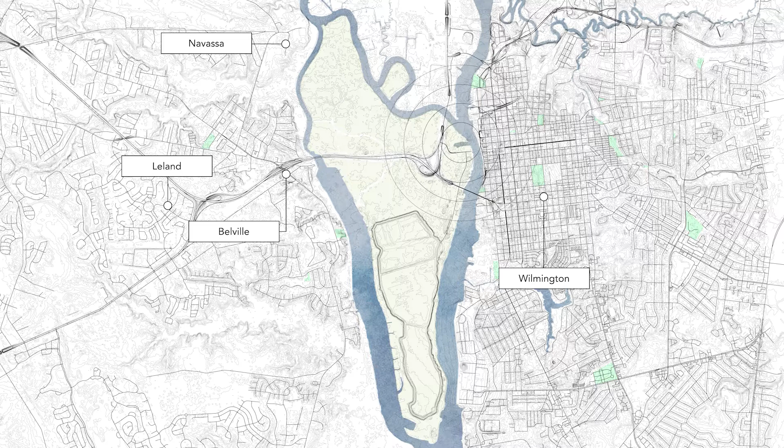Key nodes for the Connectivity Park Master Plan include an education center where visitors can learn about the island's history and the way the landscape and ecology have changed over time, or scale the observation tower for a bird's eye view of wildlife or the nearly 1,000 acres of parkland containing 7 miles of paddle trails and 8 miles of boardwalk.

There are 2 kayak hubs where park patrons can rent kayaks and explore 2 overlapping paddle trails, each approximately 3.5 miles long, and have close-up encounters with aquatic and marshland wildlife.

1.6 acres of the lagoon is dedicated to pedal boats, and crabbing stations are at the end of the half-mile boardwalk.

Several campsites are offered throughout the island to provide varying levels of overnight wildlife immersion in several unique and lively landscapes.

The Education Center is located on the high ground of the east coast of Eagles Island. It connects to the battleship through the Greenway Loop and extends the interest of its visitors further into the island. It is divided into 3 structures built in phases: water, woods, and sky.

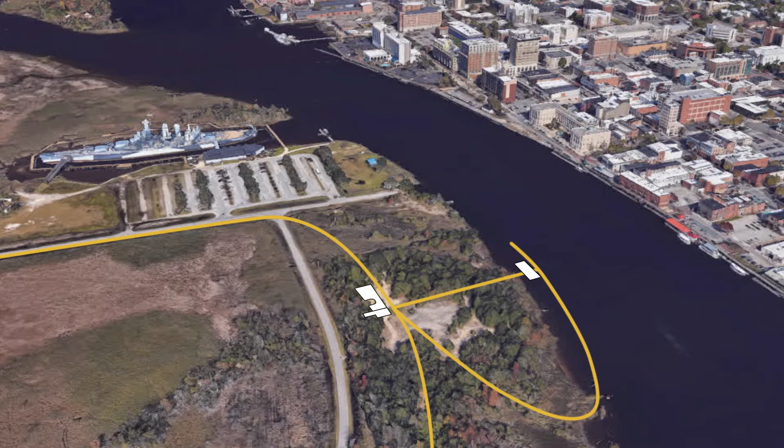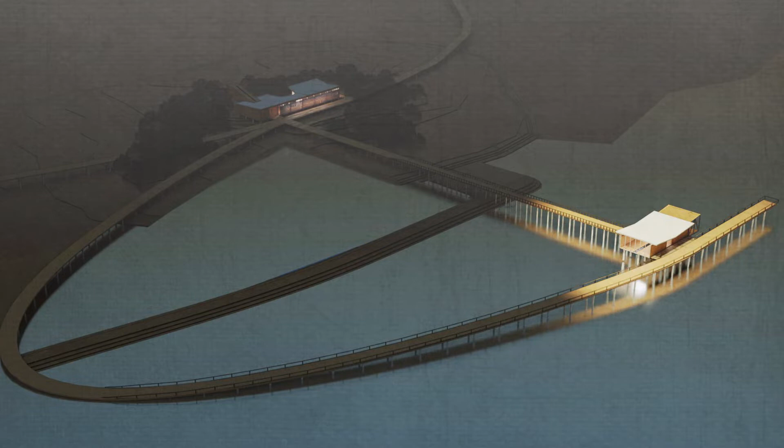These spaces offer different ways to learn about and engage with the historical and ecological features of this unique island: naval history and tidal information in the Water Center, Gullah culture in the main conditioned space, and an overview of the island and bird life in the tower.

The chosen site takes advantage of natural features in the area, including high flood-resistant topography and one of the few naturally occurring groves of trees on Eagles Island. Being above the reach of flooding ensures the building's safety and longevity, while the trees offer protection, shading, and a chance for visitors to closely interact with nature.

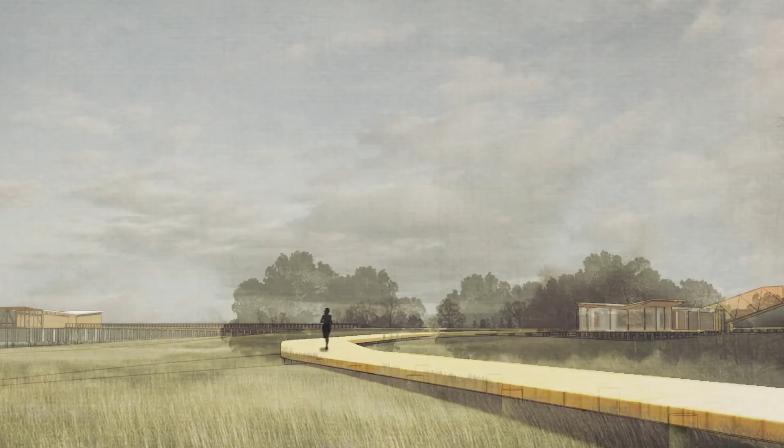Approaching the site, the greenway leads straight into the grove of trees. The main conditioned space emerges from the grove as visitors discover the building. The greenway extends along the side of the building and invites visitors to either side of the gallery inside. The building is divided on the axis created by a walkway leading to the river.

The largest area will be a flexible gallery focusing on the historical significance of the Gullah Geechee people and their contribution to the surrounding communities. A small open office will host staff functions and serve as a spot for camping registration.

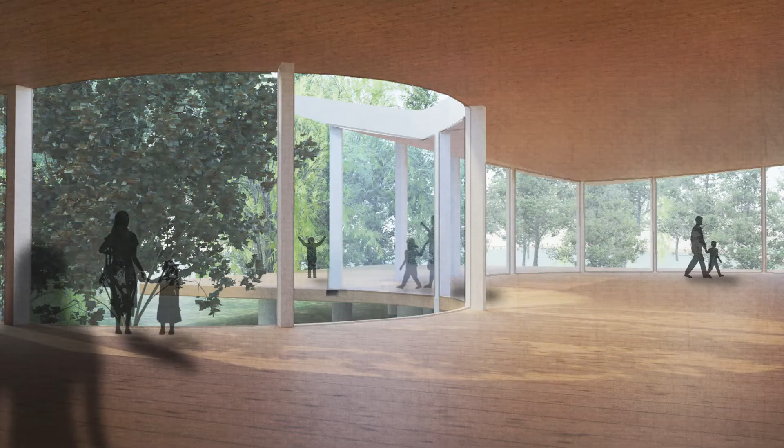The gallery is divided by a curved courtyard that turns into the space and gives visitors an up-close view of wildlife and helps the participants feel the woods surrounding them.

The butterfly roof opens toward the western edge of the trees and covers the porch area, directing the views upward into the trees. The west side of the building is full of large windows that open to a partially covered veranda that wraps around the north corner of the building, further connecting the wooded area to the interior.

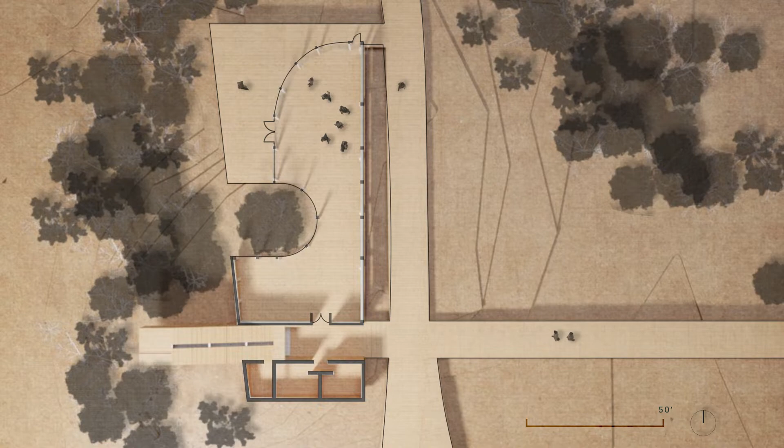The axis that divides the space guides viewers up a short staircase into the tower that protrudes from the center. It offers an opportunity for visitors to climb above the canopy and look out over the island.

The viewing tower will offer information about different sites in the master plan, as well as highlight interesting ecological features. The tower can also be used as a bird viewing station for the wide variety of indigenous bird species that call Eagles Island home.

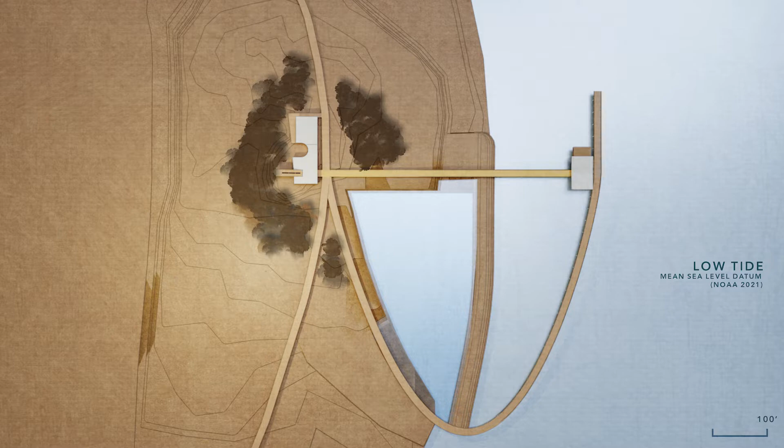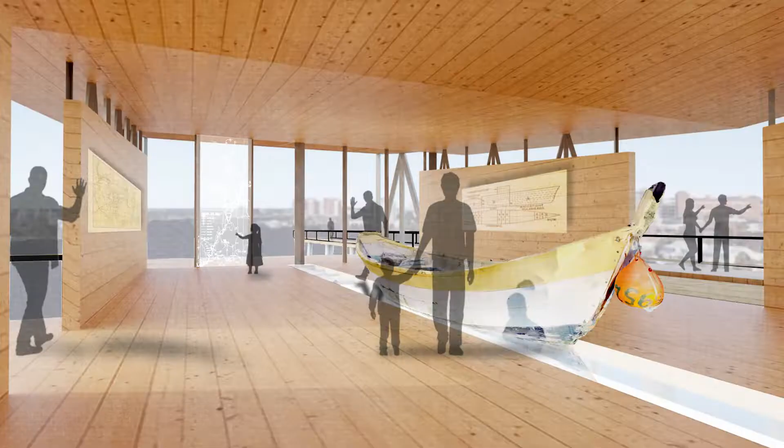Following the axis out toward the Cape Fear River, visitors will have access to the Water Center. The long boardwalk maintains the height of its origin, making the Water Center sit high above the tides. This space will focus on the naval history of the river, highlighting sites and features along the banks of the Cape Fear. The structure will focus on views going north and south along the river.

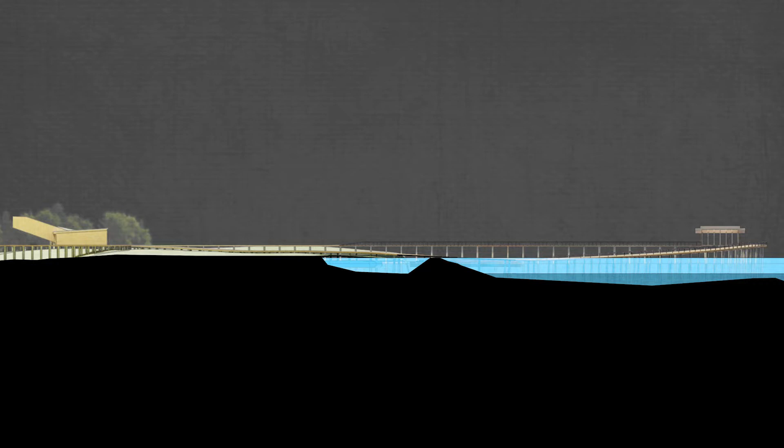These views are guided not only by the large openings on the north and south faces, but the butterfly roof opening towards those directions. A long sloping ramp will arch from the woods to the water's edge and back to the Water Center.

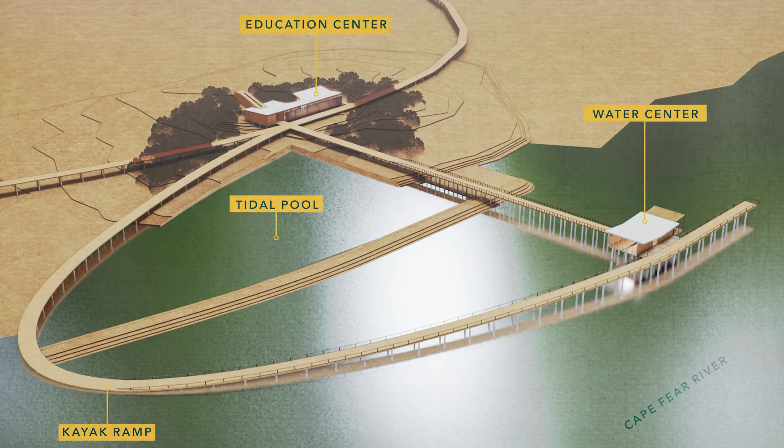Bringing visitors down to the water, they will be able to enjoy a recreation area with hands-on exploration of tidal ecology. It will be an opportunity to learn about the rich life supported by marshland and water quality improvement efforts. Visitors arriving to the site by kayak will be able to use the ramp to access the complex. The center will serve as a hub for the park and not only increase attraction to the area, but appreciation for and engagement with its rich history and ecology.

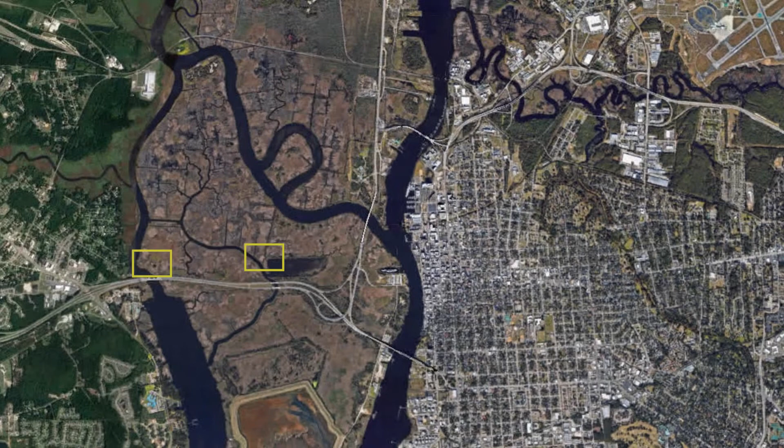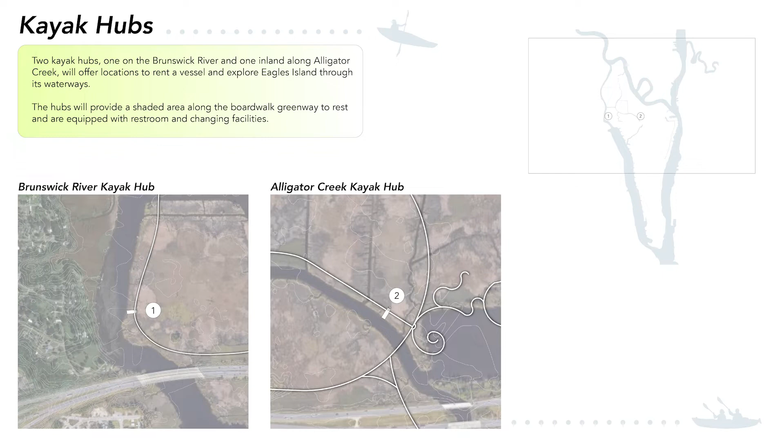For our master plan, we're proposing two kayak hubs to promote recreation and exploration of Eagles Island. Since the park will be experienced through its greenway boardwalk and waterways, we want to offer facilities for visitors to rent and launch kayaks or other low-impact vessels. A location on the west side of the island on the Brunswick River and a location inland along Alligator Creek will break up the path and create a series of nodes connecting Belville and Leland to Wilmington.

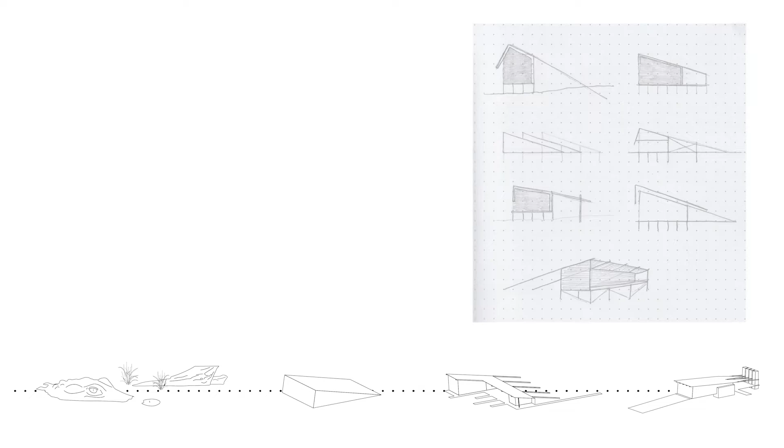Inspired by the emerging forms of the marsh, the structure will rise from the landscape and connect park visitors to the water from the boardwalk. The building will be raised on timber piles to protect it from flooding and to anchor it into the site. The boardwalk intersects the structure, creating a covered rest area where visitors could stop along the trail.

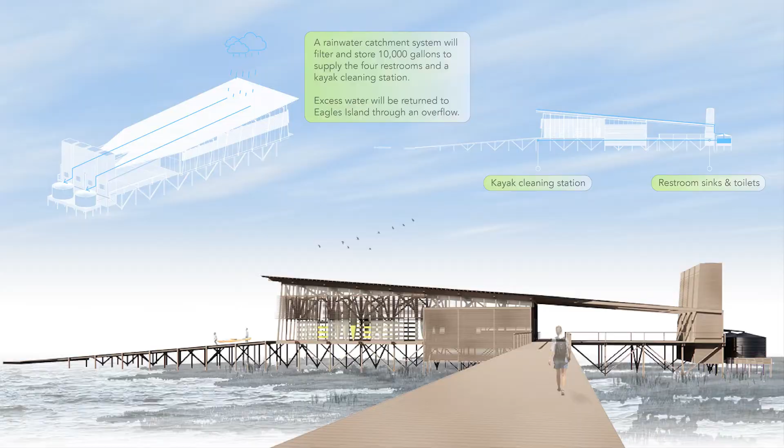Restroom and changing facilities are supplied by a rainwater catchment system that provides water for sinks, toilets, and a kayak cleaning station. Rain is channeled from a corrugated metal roof into two cisterns which filter and store the captured water. The restroom changing towers act as wayfinders in the marshland, assisting with navigation through the park, and are equipped with sinks, toilets, and a changing bench.

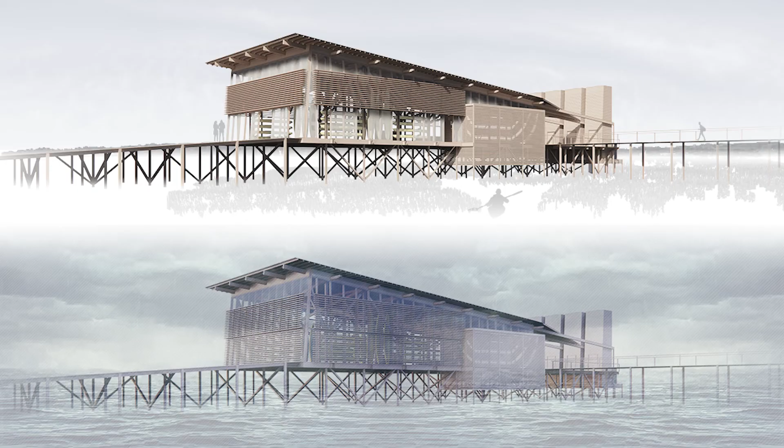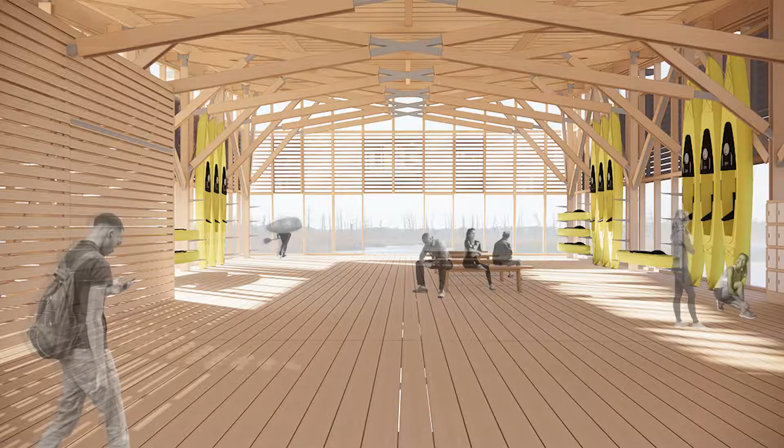The non-conditioned structure is enclosed by a system of polycarbonate panels which allows the building to open and close down. Slatted sunshades lower to protect the building during hurricanes and severe weather. Inside the hub is open storage for 40 kayaks, an equipment rental station, lockers, a lounge area, and a separate storage area for paddles, life jackets, and other gear. During the day, the polycarbonate frames slide up and lock into place to allow the building to open. In the evenings, the building can easily be closed down and secured.

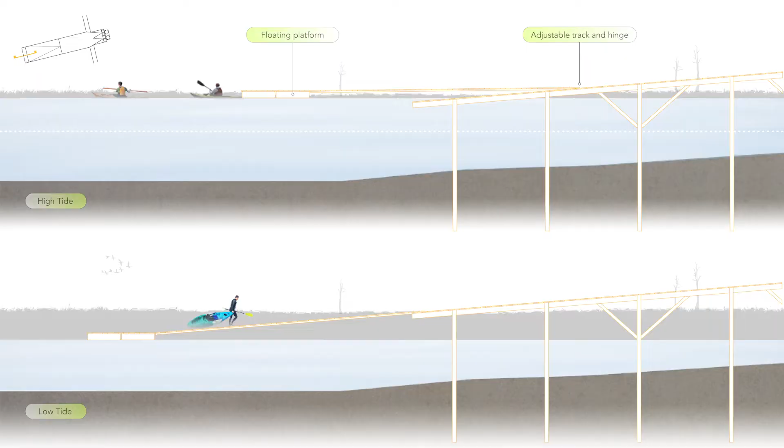Extending from the front of the structure is a ramp and launch point. At the end of the dock is a floating platform, which allows the structure to move up and down with the tide through a track and hinge mechanism. The structure is primarily timber framing with reinforced wood and steel trusses inside the building. During the day, the structure can open to allow for natural ventilation to cool the space.

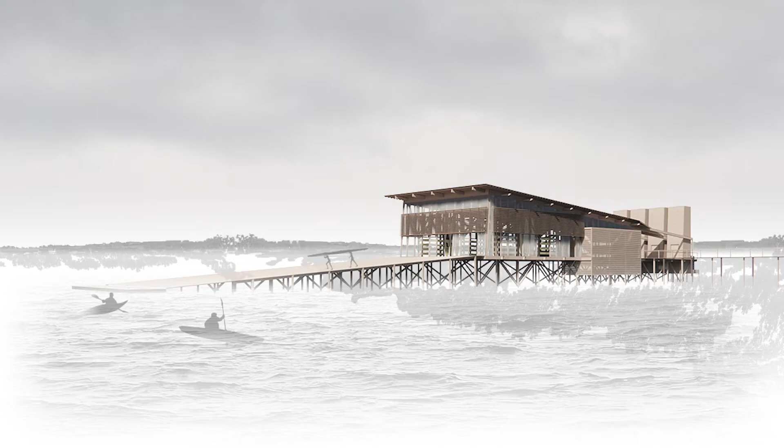Positioned on the edge of the marsh, the structure will extend out to connect the Brunswick River and Alligator Creek. Signage along the Blueway trails will guide visitors through the park and provide navigation to the remote campsites, which can only be reached by kayak or boat.

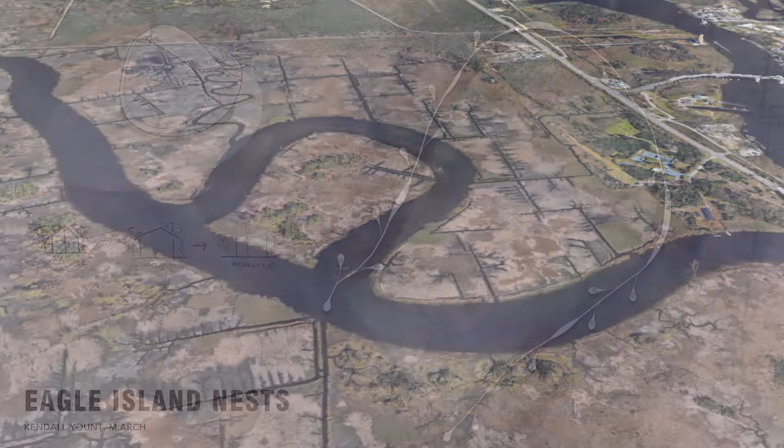A huge question asked of the existing plans for Eagles Island has to do with the proposed hotel development project slated for construction on the high ground on the east side of the island. A hotel can provide shelter and refuge for the weekend or the night, particularly to people who intend to explore the immediately adjacent surroundings, but how can this be enhanced to better take advantage of the unique ecology of Eagles Island? We believe this is an incredible opportunity to introduce camping as an alternative development option to provide visitors a place to stay and enhance the connection between humans and nature.

These camping pods represent a starting point for developing a vernacular and potentially modular system of structures for walkable and paddleable camping experiences within our proposed park, as well as along the greater Gullah Geechee Blueway Trail. This project details the potential for one remote campsite that is paddleable at the northern edge of Eagles Island. This form, originally inspired by the Gullah Geechee Fanner Basket, has two large openings that will create an immersive experience with the natural landscape of Eagles Island.

These openings will be made of a clear plastic that is connected to the structure by a zipper, allowing visitors to both enter the pod but also open and close at varying degrees to improve ventilation of the space. A secondary bug screen fabric can be zipped and unzipped from a second zipper system to allow the pod to be open without inviting too many bugs in. The ability to fall asleep in the open air creates a beautiful opportunity for connecting humans with the sounds and sights of nature.

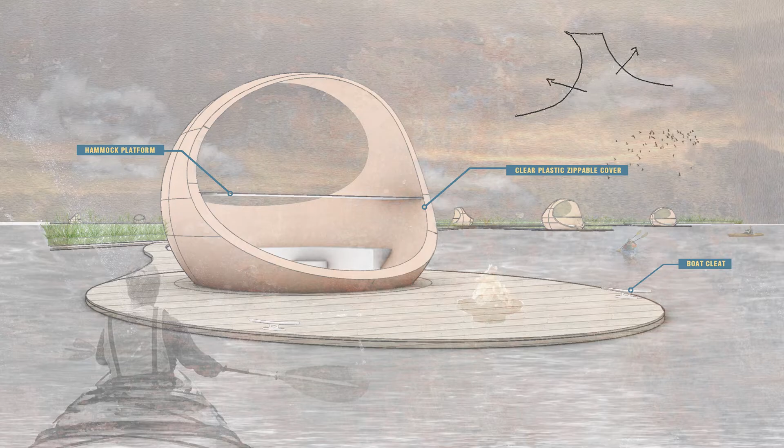The structure within the pod provides lockable storage around the perimeter for keeping luggage and food safe during the day. Cleaning supplies and trash or compost bins can be left in these cabinets to promote the leave no trace principles of outdoor ethics, which most experienced campers abide by. This is modeled in the same way storage on a boat would be created, opening from the top.

Within this casework system is a platform meant to host sleeping bags or camping mattresses oriented in a way that you can sleep and look up at the stars. There is also a mezzanine platform meant to provide space to hang a hammock and still maintain the beautiful views upward toward the sky. The dock itself provides gathering space around a fire pit or grill area to allow visitors to roast marshmallows or heat up small meals. The dock also provides several boat cleats to securely tie the kayaks to the campsite.

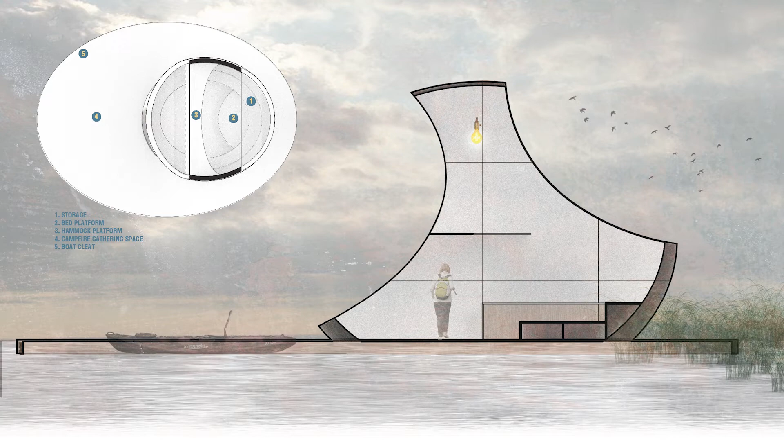The pod sits in a hole within the wooden dock structure, allowing it to move freely with the tide, but it is also secured by an adjustable chain to a small foundation in the ground to keep it from floating away. This can also accommodate for the change in sea level through flexibility of the chain's length.

The abstracted ellipsoid shape is ideal for the pods needed to float in the river, maximizing views and allowing for ventilation within the space, but not providing much shade or cooling within the structure.

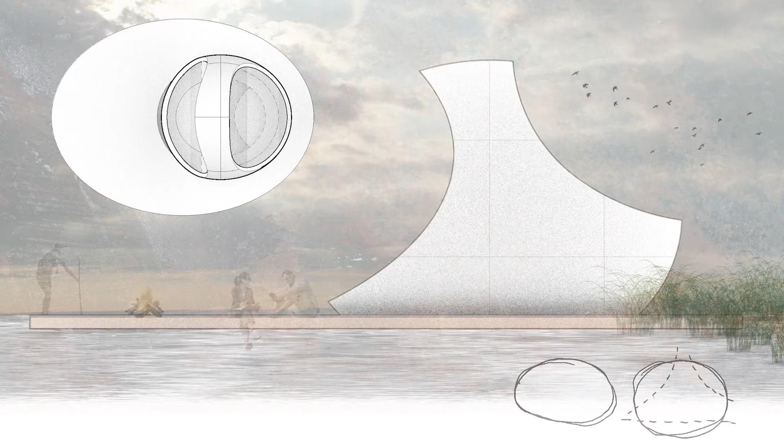A second layer of opaque fabric can be developed or used to cover portions of the apertures as a way of shading the interior. These pods are constructed of two layers of a curved, silicone-coated, fiberglass reinforced polymer panel, which is essentially a tightly woven plastic material formed to its shape.

Hardened through a silicone-heavy resin coating, this material is very lightweight, providing the opportunity for these pods to float and adapt between tide changes and even through the detriment of a big storm. This also means it won't require incredibly heavy machinery during construction, minimizing the project's disturbance of the landscape as it is being built.

This material is super elastic and flame retardant, which is helpful for allowing campfires or grills on each of the docks. It also has a life expectancy of about 25 years, and at this scale would require little to no maintenance in order to achieve that.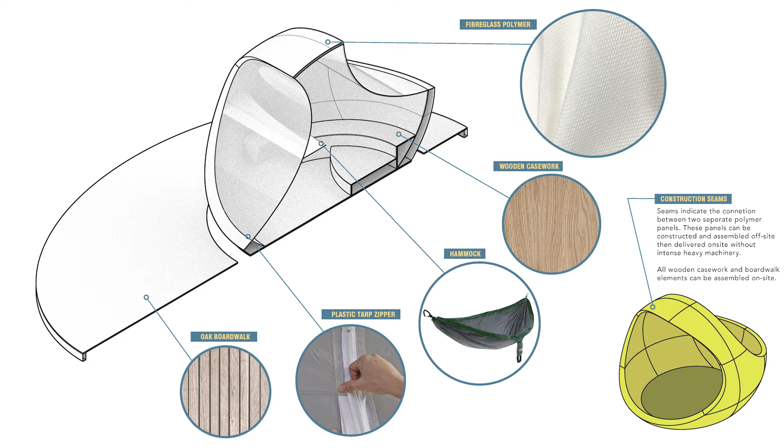Aesthetically, the material is translucent, and at night will show the glow of a lantern or lamp within the structure, creating a uniquely futuristic camping experience.

The individual pods are connected via a greater boardwalk system that snakes around the island and provides a total of 19 individual campsites that can host up to 3 campers each.

Along this boardwalk are small bulges that can be used as communal spaces and opportunities to provide power and support the pods. A pollinator garden and floating wetland provide more spaces to inspire interactions with nature as visitors make their way around the path.

Solar panels can be implemented in optimal locations to provide electricity to each of the pods, powering lights as well as one or two outlets, allowing visitors to charge their phones and maintain GPS and cellular connection. Another use for these bulges could include a bathhouse complex with rainwater harvesting to be used for low-flush toilets, sinks, and showers.

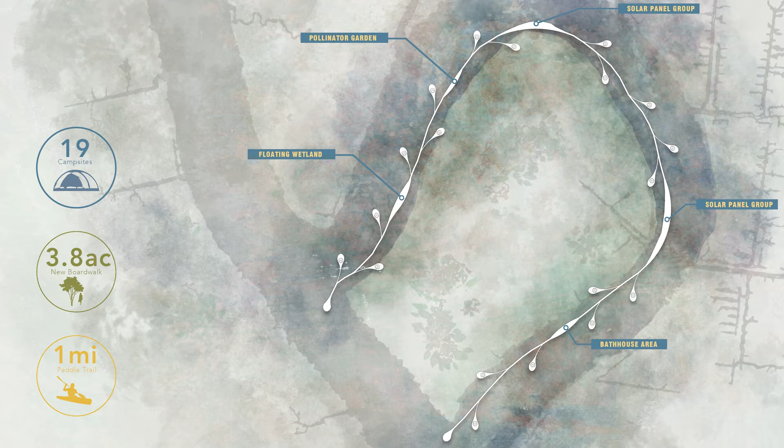At either end of the boardwalk is a viewing area that looks toward Eagles Island, providing yet another opportunity for experiencing the sights, sounds, and smells of Eagles Island ecology.

Campsites allow campers to come face to face with the birds, bugs, and fish that call Eagles Island home. Sparking curiosities can come from the ability to hear all of the sounds that go along with such remote and natural spaces. Unique to the experience of the rest of the Culture Trail users, nighttime experiences like stargazing allow a beautiful connection between humans and nature.

These campsites can accommodate a wide range of camping experiences. Beginner paddlers and campers have the comfort of a closed, sheltered space with a manageable and guided route from the kayak hub to this remote landscape.

Advanced paddlers may come here as a detour and rest before embarking on the rest of their journey along the Greater Gullah Geechee Blueway Trail.

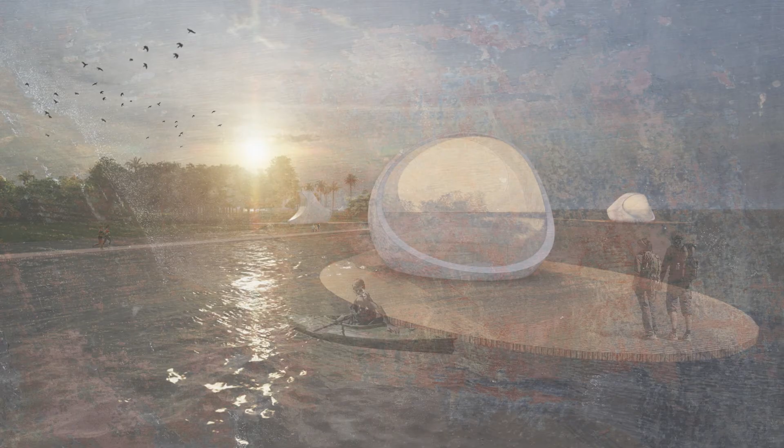As the sun sets on the Eagles Island Nest campsites, the soft glow of lanterns within each pod identifies a community of users participating in this special experience with the ecological elements of Eagles Island.

Views are oriented towards the river and the island, but other pods are visible while journeying along the connective boardwalk, looping around this sub-island territory.

This concept of safety and community cannot be achieved in a hotel with doors and hallways, but better within this open-air experiential activity. The remoteness of the site allows unfiltered and beautifully natural noises from birds, bugs, as well as unique encounters with animals that would be impossible to experience near a paved parking lot full of cars and the massiveness of a hotel.

The overall mission of these campsites is to provide a unique experience to spark interest in Eagles Island, a safe place to rest and relax along the trails, and provide low impact ecological interactions and sensible cultural education. These are things that cannot be achieved with an ordinary hotel or hostel.

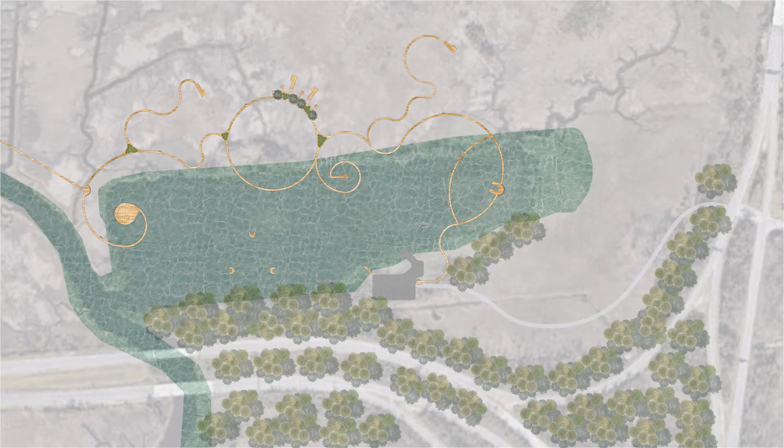At the center of Connectivity Park lies Little Blue Lagoon, a 32-acre body of brackish water that serves as one of the vital nurseries of the sea. With newly added parking for up to 30 cars, the slower moving water in this area of the park provides an opportunity for a family friendly exploration of the island.

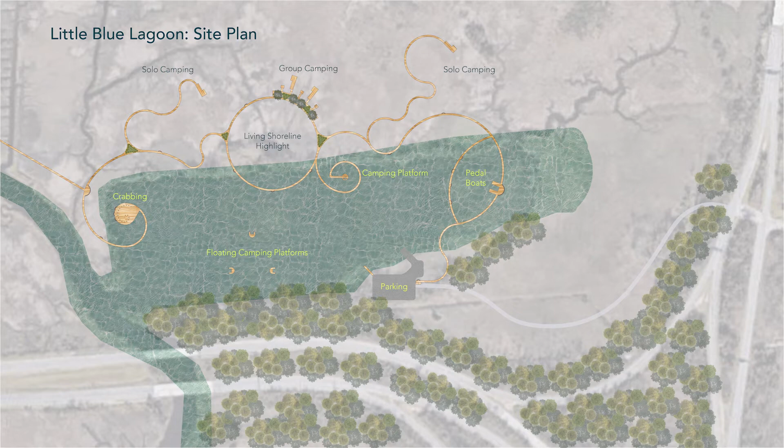Make a splash in our pedal boats, or experience a quick teaser of the landscapes Eagles Island has to offer by hiking the half-mile lagoon trail that weaves through water, marshes, and upland vegetation, and even features a living shoreline demonstration. At the end of the trail, hikers can go crabbing, explore floating treatment wetlands, or take a rest with a panoramic view of Little Blue Lagoon.

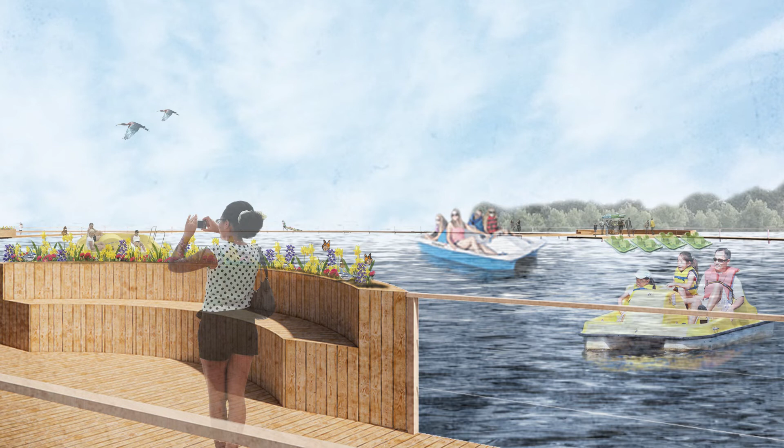The pedal boats lie within a 1.6-acre area sequestered by boardwalk to prevent the boats from entering the creek. The dock has capacity for 15 pedal boats, seating up to 5 people each, and life jackets are stored inside a bench near the dock.

Planter benches along the boardwalk provide seating for onlookers or nature watchers. A living shoreline will be implemented along the length of the boardwalk to mitigate construction impact, improve water quality, and support conservation efforts.

The average tidal fluctuation for the island is 4.5 feet. The boardwalk is elevated to the level of high tide, providing an up-close view of the mudflats during low tide. Campsites are above base flood elevation, and their form was inspired by winnowing houses used by the Gullah Geechee to separate rice from its chaff.

To minimize the disturbance of wildlife in the nursery area, the wooden boardwalk will be supported by galvanized steel helical piles. Oyster reef balls will be visible at low tide. These structures provide a wave break and a home to oyster larvae who can reproduce on its surface, and shelter and food for crabs who eat some of the oysters.

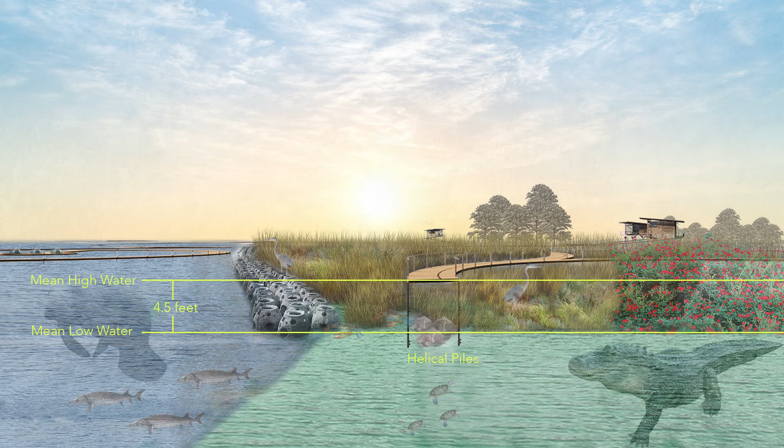Oysters filter nutrients and sediment out of the water, providing more sunlight for subaquatic vegetation. Seagrasses such as eelgrass and shoalgrass stabilize the seafloor and provide habitat for animals like juvenile fish and food for species such as the endangered manatee.

Low marsh plants aren't just wispy grasses like the smooth cordgrass you see here, but beautiful clusters of low-growing pickerel weed and bright but soft sea oxeye daisies that look beautiful while reducing erosion and feeding pollinators. Fish and crabs enter this area of the landscape while it is flooded.

The high marsh won't flood as often, but it still needs resilient coastal plants for extreme tides and storm events, so the planting palette includes the interesting texture of bright green succulent glasswort, the seemingly delicate blooms of Carolina sea lavender, and the wispy red tips of desert saltgrass. The high marsh intercepts stormwater runoff before it reaches the estuary.

The tidal buffer and upland zones of Eagles Island currently consist of plants that are struggling to deal with saltwater inundation, such as sweet gums and cypress trees. There are several species of upland and tidal buffer plants that can withstand saltwater flooding, and it is important to introduce these species to stabilize upland soil and have resilient plantings for impending sea level rise.

Each of the upland plants shown offer food and shelter to birds and mammals throughout the island, including black bears, songbirds, and foxes.

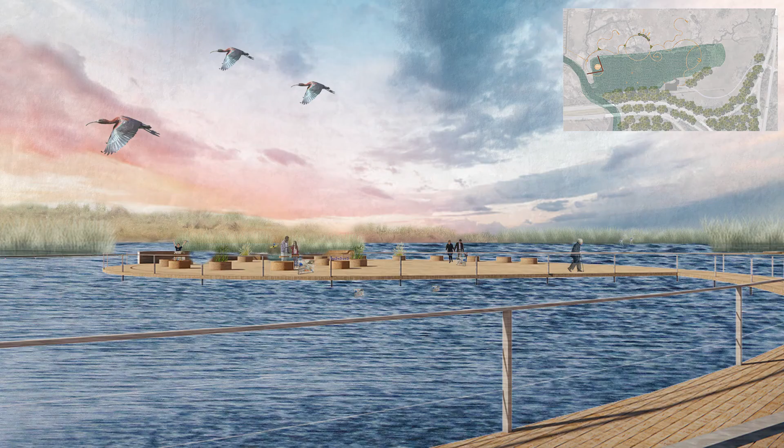The prominence of the sport of crabbing has actually sparked community conservation efforts, and New Hanover and Brunswick counties already have oyster shell drop-off sites. Blue crabs are abundant, while the oysters they feed on and whose reefs they take shelter in are not, so recycling their shells helps grow more oysters more quickly.

Connectivity Park could be an additional shell recycle site or a recipient of recycled shells. Therefore, formal crabbing stations have been created to engage the community in a conservation conversation.

The form of the crabbing stations was inspired by dye pits used in West and Central Africa and by the Gullah Geechee to turn indigo plants into dye. Some of the boardwalk cutouts are simply crabbing holes, which double as observation holes, while others are indigo planters to honor the Gullah Geechee more explicitly, and still others are floating treatment wetlands to further reinforce the importance of improving water quality and to attract marine life to the dock.

Crabbing offers another conservation opportunity. Traditional crab traps have resulted in the unintended deaths of countless sturgeons, which are now endangered, and terrapins, which are a species of special concern.

When equipped with bycatch reduction devices, a small orange plastic piece that is too small for most terrapins and sturgeons to fit through, the threat is virtually eliminated, and users can enjoy the sport of crabbing without sacrificing other animals in the ecosystem.

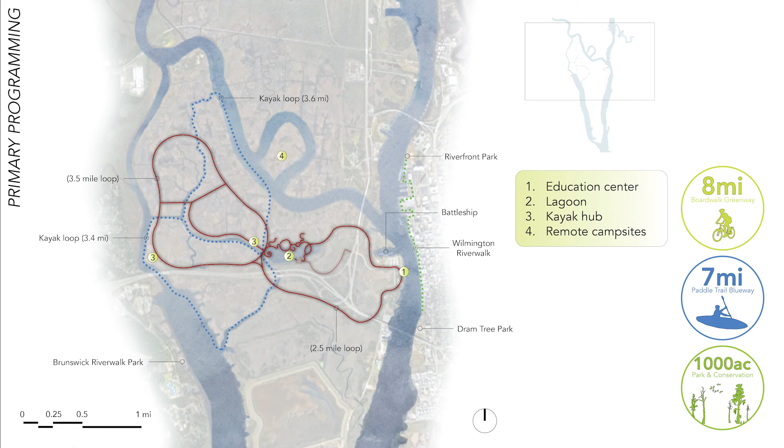A range of campsites suitable for beginner to advanced campers will take advantage of the island's diverse landscape. Conservation efforts will be seamlessly integrated through habitat restoration and beautification, supported by low-impact recreation. The remnant rice canals will remain as an important part of history and the island's dynamic ecology. Connectivity Park will establish Eagles Island as a premier ecological and cultural destination.